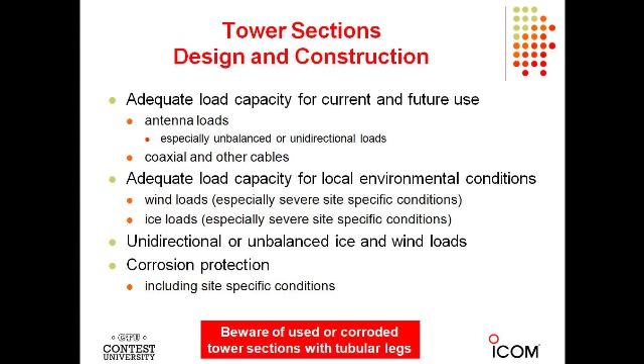So if you live in most of the United States where ice is an issue, you really got to give thought to that, especially if you have things hung off the side of the tower, like a dipole. Okay, so in terms of maintenance and inspections,

Not. It takes maybe an hour, once a year. You've got an investment in a tower and antenna system that's certainly thousands of dollars, in many cases more than that. We're all competitors. We wouldn't be here otherwise. What's the point in getting into a competition if you're not prepared? Go out there, spend an hour once a year, take a look at your outdoor antenna system and make sure nothing has happened. Another thing you should look at is just look straight up the tower legs and make sure the tower is reasonably plumb.

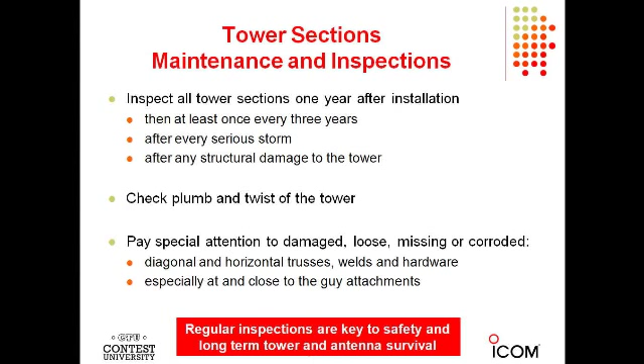Tower base. The biggest mistake I usually see, and I would guess if my experience applies to the people in this room, and it probably does, I would guess about half of you have a problem here. And here are the mistakes that people make. You think, well, I'm not going to be in this house for a long time, so I'm going to put the foundation of my tower so the top of the foundation is at grade level or a little bit below, so when I sell the house, I can cover up the foundation. Disaster for the tower, because all kinds of moisture is going to accumulate on that foundation that's at or below grade level.

Or you don't pay any attention at all to the inevitable accumulation of debris at that tower base. If you haven't looked at your tower base in the last 6 months, it's a pretty good chance that you've accumulated grass, if it's in an area that you mow, leaves, all kinds of other debris. All of that stuff retains moisture, and moisture is fatal to the tower legs, especially in a self-supporting tower that relies only on the foundation for its support. Doesn't take much time to go out and take a look at that tower base.

And if it wasn't properly installed, or if the drainage is inadequate for any reason, it's very easy to retrofit that foundation, to put a concrete cap on it, to take away some of the soil in the immediate vicinity so that it drains properly. But take a look. Half of you in this room have got a problem here. And if you think you might, go out and take a look. If you haven't looked at your tower base in the last 3 or 4 months, take a look. Clean that tower base. It doesn't take but a few seconds.

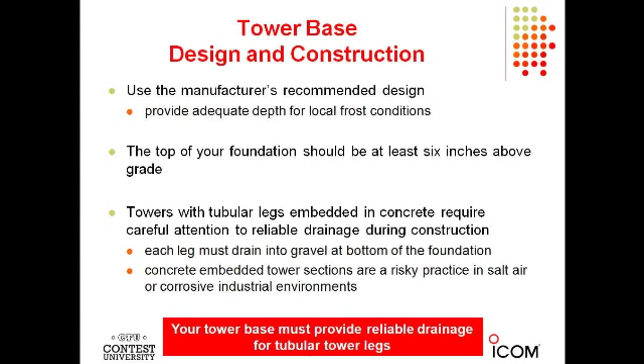So these are the common things. Standing water on the foundation, that's usually a result of an incorrect installation. This happens just about anywhere. And settling and cracks can also happen, not as common, but it can happen. And the place you really want to inspect is the place where the tower legs meet the concrete foundation. As the tower begins to fail, you will notice that the galvanization on the tower has started to fail right at that point where the galvanization hits the concrete. That's usually caused by debris accumulation or constant moisture, and that interface begins to fail.

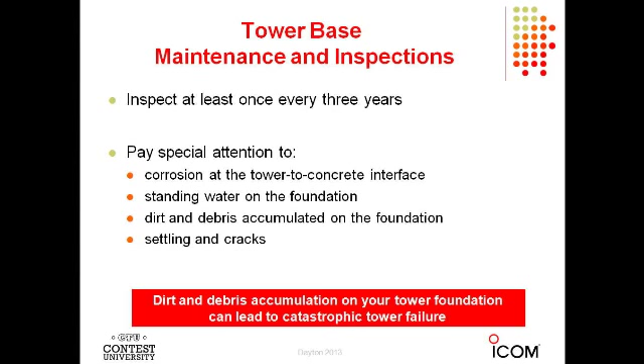Guy anchors. Half the people in this room have gone to a retail place like Home Depot to buy their hardware for guy anchors. That is the wrong material to use, period. No exceptions. They do not sell the industrial-grade hardware that should be used on towers, exclusively, no exceptions. If you look at amateur tower installations, you will find all kinds of crazy stuff used for guy wire. You'll find all kinds of crazy clamps that are used to terminate the guy wires.

You should be using materials that are acquired from industrial suppliers or ham-oriented tower sellers, such as any of the major companies that sell Rohn tower, for example. They usually sell the proper accessories to go with that tower. Do not go to Home Depot or your other supplier. That's the biggest mistake you'll make when you walk into that place and try to find something that's good enough.

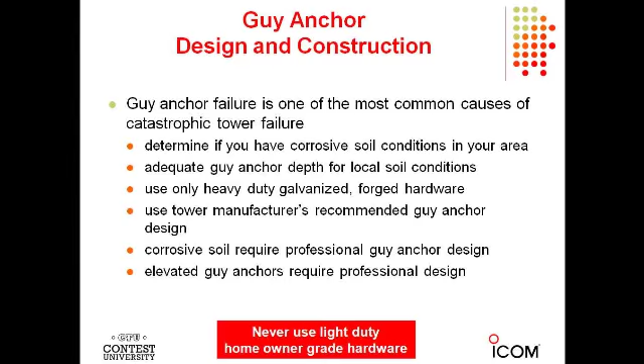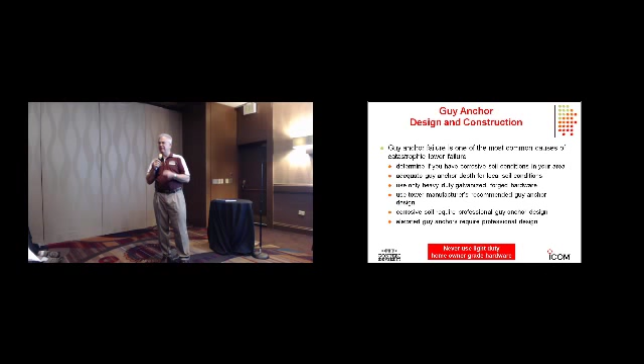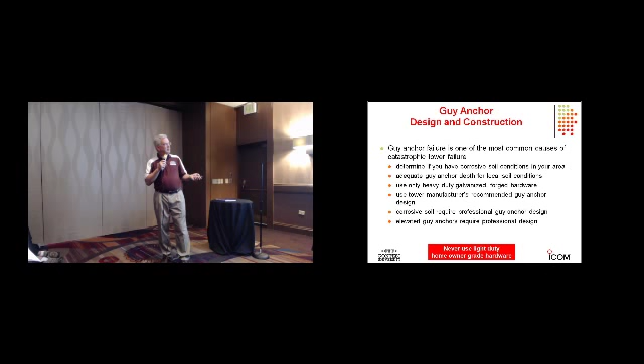It's not. And if any of you have any of that kind of material on your towers or your guy anchors, good project for this year to replace it all. Guy wires, clamps, all that stuff is completely inappropriate if obtained from a normal homeowner kind of a seller. So this hardware and guy wire is a big threat to the long-term integrity, or even short-term, quite honestly, for some systems that I've seen. And this is not a rare case. It's a common case. Hams are cheap and they use the wrong stuff.

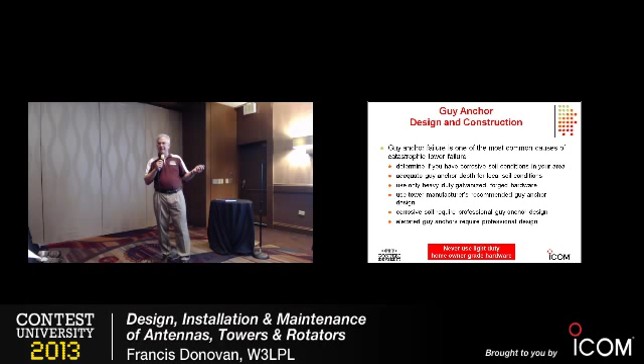And you save pennies. Almost no savings, and you put at threat thousands of dollars of investment as a result of a terrible decision. So this is the stuff to look for. It takes only a few minutes to do this.

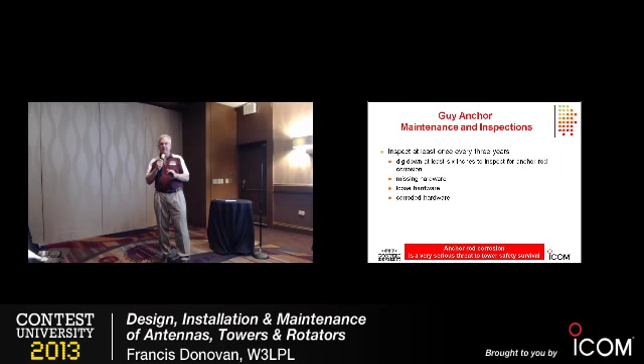Yes, every so often if you have anchors that extend down through the ground, particularly if you're in a corrosive environment, if your soil is known to be corrosive, you should be doing this very frequently. If your soil is known not to be corrosive, every few years just take a shovel, dig down 6 inches. When the soil is moist, it doesn't take more than a minute to dig down 6 inches and take a look.

And anchor rod corrosion, I'll tell you a little story about K6LL. I went to college with Dave, and he was telling me about one day when he noticed one of his guy wires was loose. So it seemed rather odd, but he knew how to tighten the guy wire, went out there and tightened it, and the anchor pulled right out of the ground.

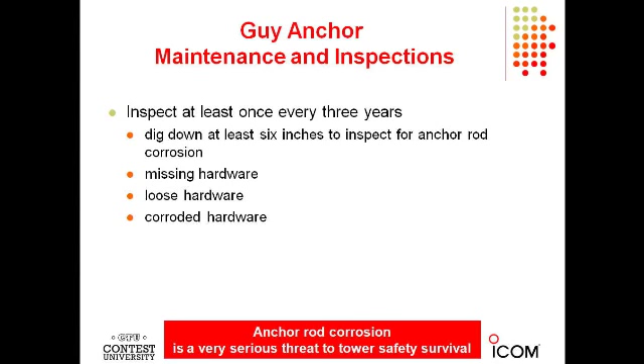And the place where the anchor failed looked like a point of a pencil. Just all of the steel had eroded away. He has very corrosive soil. You need to take very, very careful attention to guy anchors if you have corrosive soil.

Again, the same story here with guy wire. You want to use the stuff that's sold by the company where you bought your tower, not Home Depot. It's junk for our use. Very important here. Many of us are aware of this recommendation for 10% tension.

This is one of the reasons why you want to choose the right size of guy wire for your tower also. The tower manufacturer will recommend a particular diameter guy wire to be used with your tower. That is the diameter of the guy wire you should use. Certainly nothing smaller because it's not capable of withstanding the forces that you expect on the guy wire.

But you also don't want to use a heavier guy wire either, because you will also have to tension that heavy guy wire to 10% of its breaking strength, and you are putting unnecessary extra force on the tower, which is causing the tower to be weaker. So you want to use the manufacturer's recommended guy wire. Tension it to 10% of breaking strength.

If it's less than 7%, the guy wires are likely to gallop in the wind. As you get a heavy wind, the tower actually deflects. The downstream guy wire gets to be very loose. And if the guy tension is less than about 7%, you have excessive tower flexing and galloping guy wires.

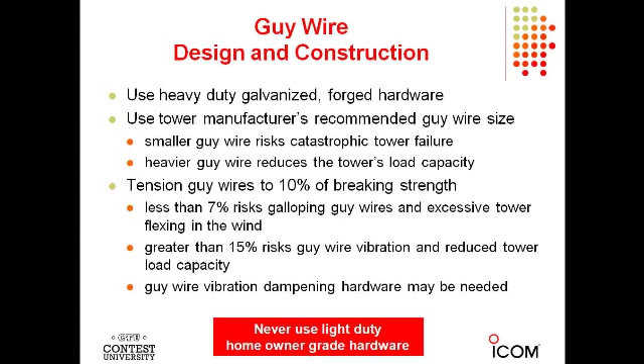And again, corrosion is the big thing to look for. And in some cases, it can be real severe. You need to look at the guy wire, too, and you can do that with a pair of binoculars. This is particularly an issue if you use cheap guy wire, or somebody gave you guy wire when you put in your installation that was already beginning to corrode, so it's lost 10 years of its life already, and in the next 10 years it'll need replacement. And guy wire also has a lifetime of about 15 or 20 years when it'll need replacement anyhow.

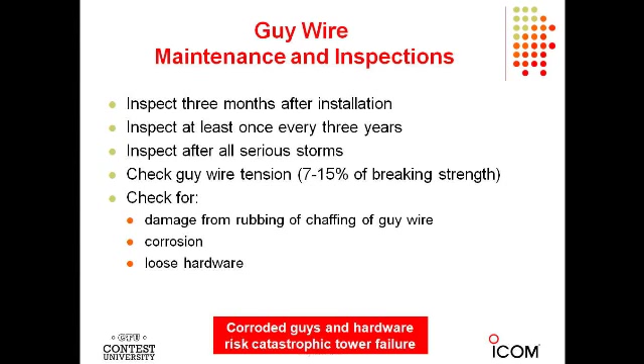Guy attachment hardware. What I'm speaking about here is the mechanism that's used to attach a guy wire to a tower. If you look at ham installations, you'll see all kinds of crazy ways that guy wires attach to the tower. The only way to attach guy wire to a tower is the way the tower manufacturer recommends it. Take a look at the Rohn catalog. Most hams use the Rohn catalog, Rohn tower, or whatever tower you're using.

You should only be using the guy attachment mechanism that the manufacturer recommended. If you've used anything else, you've degraded the performance of your tower, and you don't know by how much because nobody's evaluated it. So if your towers are not using the manufacturer recommended guy attachment hardware, put it on your to-do list for this summer to change it over to what the manufacturer recommended.

Fancy word, articulated guy wire connections. In the wind, your guy, if you look at it in a heavy windstorm, is moving all over the place. And you want to be sure that the connections to the tower allow free movement of the guy wire in any direction. So what you need to be using, and the manufacturers will all show you this in their catalogs, is a shackle at that connection point so the guy wire can move up and down, left and right freely.

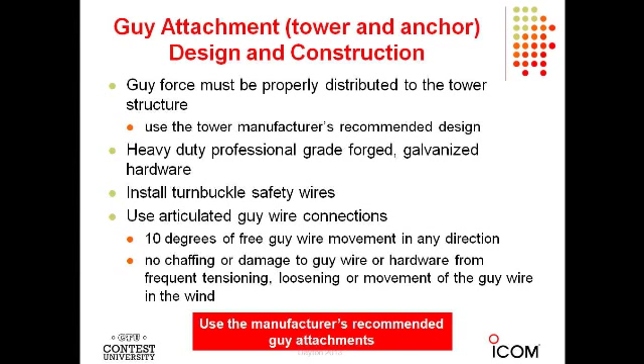Maintenance and inspections. Take a look when you climb the tower. Just remember, in the process of climbing the tower next time to do some little job, I'm going to look at the tower to see if there's any missing hardware. I'm going to look at all the guy attachment points and make sure nothing funny is going on there. It just takes a few seconds as you climb past those guy attachments to make sure everything is as it should be. And these are the simple things you look for. Very simple things, and I won't read them. Just when you climb the tower next, take a look for all that stuff and make sure everything is in order.

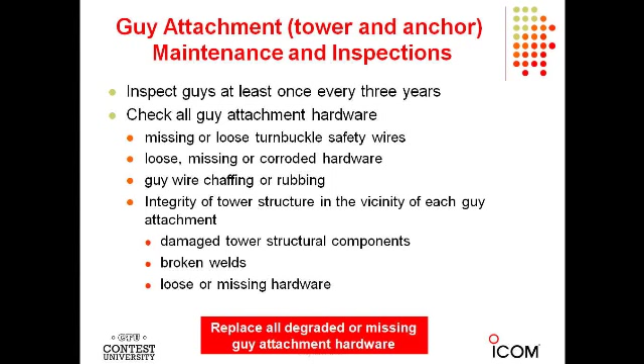Especially look for any broken welds on a Rohn tower. If you have a tower that is very heavily loaded, that's one of the dangerous things that can happen, especially around the guy attachments, is that you can see a broken weld, and that's a pretty dangerous thing to find. And you really need to hire a professional to do something about that if you find it, and you shouldn't wait.

Lightning protection. 90% of the people in this room have a problem here if you're in a lightning environment. This is what your tower should look like if you've done it correctly. There should be at least 3 ground rods located near the tower foundation, but not too close. About the length of the ground rod is the right distance for the ground rod to be placed. So if the ground rod is 8 feet long, which is what they typically are, those ground rods should be about 8 feet away from the tower base. There should be 3 of them. And then they should be about 8 feet from each other.

Also, for the guy anchors, they should also have ground rods. One ground rod is sufficient. The preference for ground rods these days is to use a galvanized ground rod. The good news is galvanized ground rods are readily available.

Why not copper? Well, the copper ground rod interacts with and creates a battery with the galvanized steel tower base. And that battery with moist soil, about 8 feet of moist soil between the copper ground rod and the galvanized steel tower base, creates accelerated corrosion at the tower base and also at the guy anchors. So the requirement for the current EIA specification is not to use copper ground rods anymore for tower installations. You should be using galvanized.

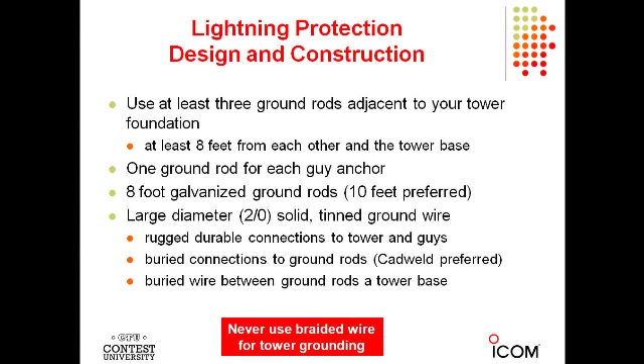So if any of you have any braid exposed outdoors, put it on your list of to-dos to get rid of it. You should only be using solid copper wire or stranded copper wire, but never, never, never braid outdoors. Very easy to inspect your tower base to look for issues here. It's not uncommon for people who have lawnmowers or maybe an accident that might happen in climbing a tower for something to go wrong with the grounding system at the tower base.

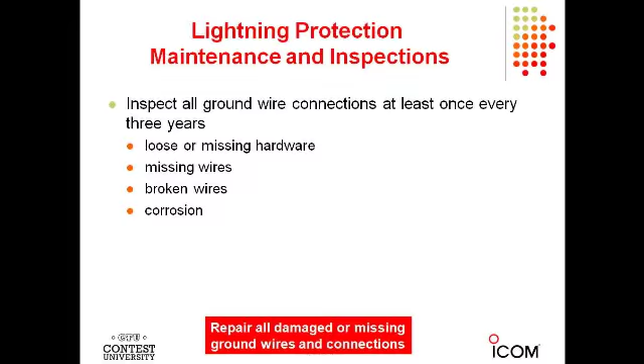Rotators. This is the mistake most people make. Sometimes we'll encounter a heavy windstorm or something and realize right away that a mistake has been made. But the more common thing is that a well-designed rotator should give us 10, 15 years service without any problem. But with an overloaded rotator, you might only get 3 or 4 years service, and in the next contest it'll break. So you should be using a properly rated rotator, and I'd guess 20% of the people in this room are using a rotator that's underrated.

The control cable should be adequate size. So you have to consider the length of the control cable to determine whether it is the proper size or not. Most manufacturers give a recommendation, and you should follow it. And this is a place where we commonly find stainless steel hardware on rotators, the U-bolts, for example, on the very popular Tailtwister rotator or the Ham series. This hardware is very subject to galling.

And anybody who's used stainless has probably experienced this problem of just innocently putting a nut on a stainless steel bolt or a U-bolt, putting it on by hand, suddenly it won't turn anymore. And you get out a tool to try to turn it, and you can't turn it. Whenever you, on any stainless steel hardware, but especially on a tower where it's really hard to do maintenance, use some inexpensive anti-galling compound applied to the threads, and the galling problem goes away.

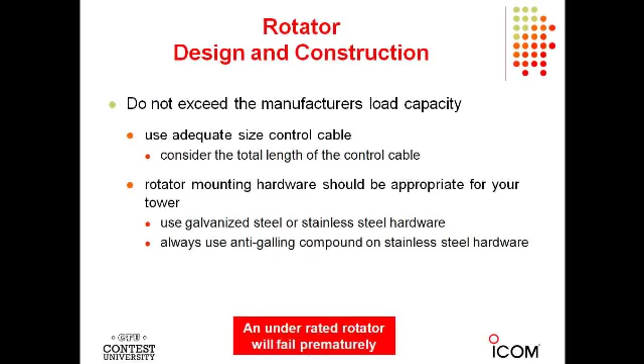Also very easy to perform an inspection. Usually if there's some kind of an issue with your rotator, you can see it from the ground. Something has changed about the way that antenna behaves in the wind. So take a look at it. Very often it's caused by this kind of a problem.

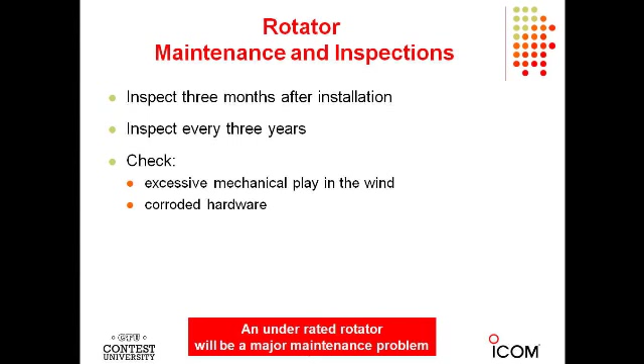Okay. An awful lot of antennas are manufactured in California. An awful lot of those antennas don't survive on the East Coast. I wonder why.

The ice environment on the East Coast can be pretty severe, and the guys in California don't even think about it. And particularly 10, 20 or 30 years ago when these antennas were first manufactured, they failed very quickly in the environment on the East Coast, and I think a lot of the manufacturers have figured out that they want to sell these antennas and have happy customers on the right side of the map as well as on the left side of the map. So this has gotten a little bit better, but you have to think about a commercial antenna as well as a homemade antenna as to how well it will survive in ice.

I've had some pretty bad experiences with this, but I also paid a lot of attention when I was in kindergarten. So when things fail, you make them bigger and bigger and heavier until they finally don't fall apart. But let me tell you about some of my experiences early on. When I moved my location about 25 years ago, I moved to a much higher elevation, and I did not anticipate the effects of ice.

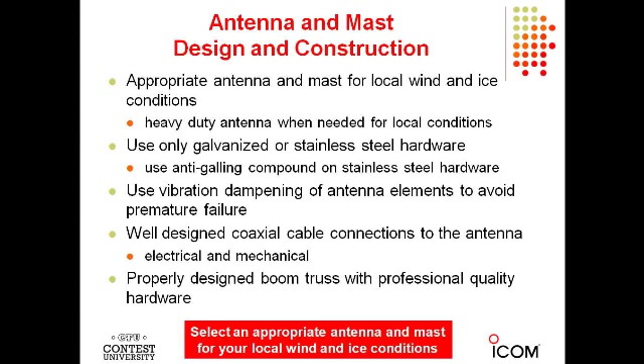Vibration is also an issue. And if you see your elements vibrating in the wind, it's not going to be too long before you see that piece of an element sitting on the ground. So some manufacturers take care of this in the design of their antennas. But if you ever see this problem, you've got to do something about it because it's going to lead to a failure. Just like singing guy wires lead to a failure of the tower, vibration, and it's the high frequency vibration that's the real threat, not just galloping, but vibration enough so that if you put your ear on the tower, you can hear it. Or if you look at the antenna, you can see that it's vibrating very rapidly. You've got to do something about that. So know your conditions and do the right thing in the installation, and pay attention to what's going on.

Now, in my next presentation, I'm going to speak a lot about coaxial cables. Well over half of you have got problems in your coaxial cables today, somewhere in your station. And the most likely place where your problem exists is at the connector interface to the cable. Most hams use the wrong connectors. You can go out in the flea market and for $2 you can buy a cheap connector for your cable. Or you can go to any number of sources on the web and buy the Amphenol 83-1SP connector, which is a very high quality connector, and it will survive.

But this other junk, and probably more than half of you are using the wrong PL259s, leads to problems of all kinds. They're difficult to solder. Many of the foreign-made components have the improper tolerances on the center pin in particular. So if you're not using Amphenol 83-1SP PL259s, very good chance you've got a problem in your system.

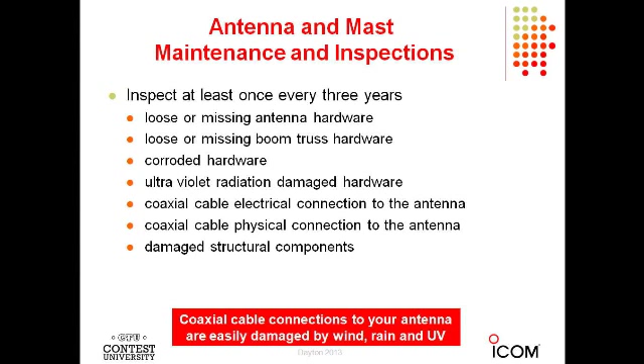Attachment of coaxial cables to towers. As the wind blows, as the ice accumulates, the coaxial cables or control lines attached to the tower undergo a lot of stress. The coaxial cables should be fastened to the tower at regular intervals so they are not slapping against the tower and all kinds of places on the tower where damage could occur. And the appropriate kind of hardware should be used to attach coaxial cables and control cables to the tower. And one of the best ways to do this is a very, very cheap way.

Number 12 insulated copper wire, the kind of stuff you see in normal house wiring. Number 12 insulated copper wire is a very good twist. It's like a twist tie. You use that to attach the cables to the tower. It works very well. A nice thing about it is if you need to remove it, it's very easy to remove, and you can reapply it at least once. If you use tape, use a high-quality tape such as Scotch 88. That's the most resilient. It's thicker. Or Scotch 33, but you wind up using more of Scotch 33 so you don't save any money.

95% of the people in this room do not have their coaxial cable shields connected to the top of the tower. Why is this important? In a lightning strike, and if you live in a lightning area, you're going to get lightning strikes, there's a tremendous amount of current that flows down the tower and down all the cables. If there's a voltage differential between the cables and the tower, and there's thousands of amperes flowing, so there could be a differential, what will happen is that an arc will occur between the cable and the tower. That arc will perforate the jacket of the cable, and you'll never notice it.

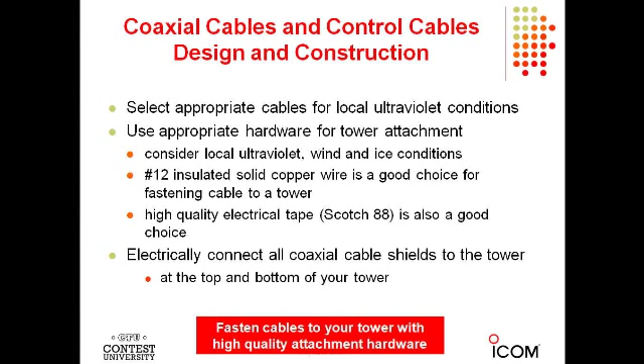So how do we tell if something has gone wrong with our coaxial cables? I would guess 50% of the people in this room have at least one cable in their station that has degraded over time. And how do you know? Well, make an investment in one of these tools. Certainly, with modern transceivers, everybody's got a VSWR meter of some kind in the transceiver. Another very good thing to obtain is something like an MFJ 259. A lot of us have that.

You can buy time domain reflectometers on eBay for a few $100s. Anybody with a serious station, it's worth investing a few $100s in a time domain reflectometer that'll allow you to examine the entire length of your cable system, including the antenna that it's connected to. Or for more money, a vector network analyzer that only the most serious people will invest in. But with any of these tools, from something all of us have to something inexpensive for all of us to obtain, to more sophisticated things, these tools allow you to detect degradation over time. If any of the measurements you make change, something's gone wrong. Something has not gotten better if the measurements change.

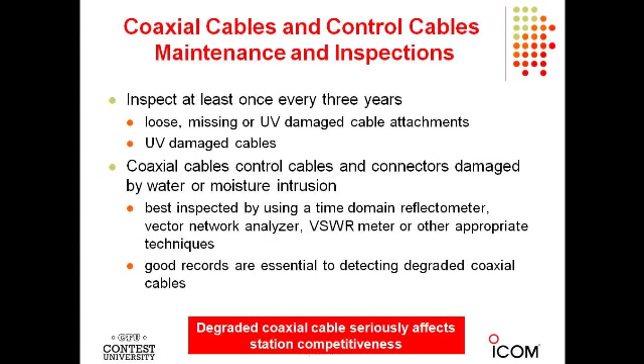Hopefully this presentation has given every one of you an idea of something to look for to improve your tower system that's only going to take you a few minutes to execute. A few minutes to think about when you invest in the next tower or an antenna you're going to install. And it's going to make a significant difference in the performance of your antenna and tower system over time. Inspections are the big thing that most people don't do. Most of you don't do it. And it's really, really easy. It's not in the ham vernacular to do that. And it's so simple to do.

Think about inspections when you climb the tower. When you're outdoors, bring out a pair of binoculars and take a look at what's going on with your tower. It's essential to the long-term survival of the tower and the reliability and performance of your antennas. Do the inspection in the first year after you build the system or any major modifications, then at least every 3 years. If you're in a severe environment, it should be more often than every 3 years. Do those measurements inside your shack in the winter when you're wondering what to do with some spare time. Takes only a few minutes. Make a record. And after serious storms or when that tree falls on the guy wire, do a major inspection and make sure nothing escaped your purview.

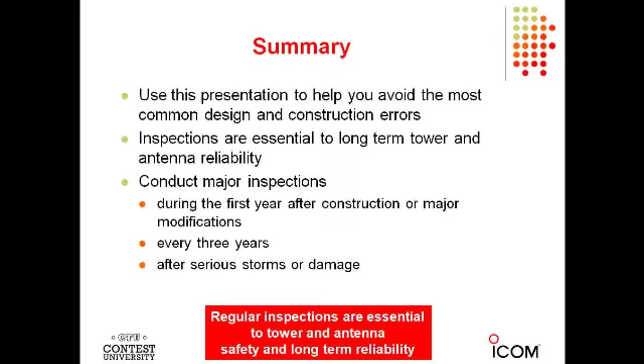I'll just ask one question, please. When do you look at in-place coax? I know it's different environments.